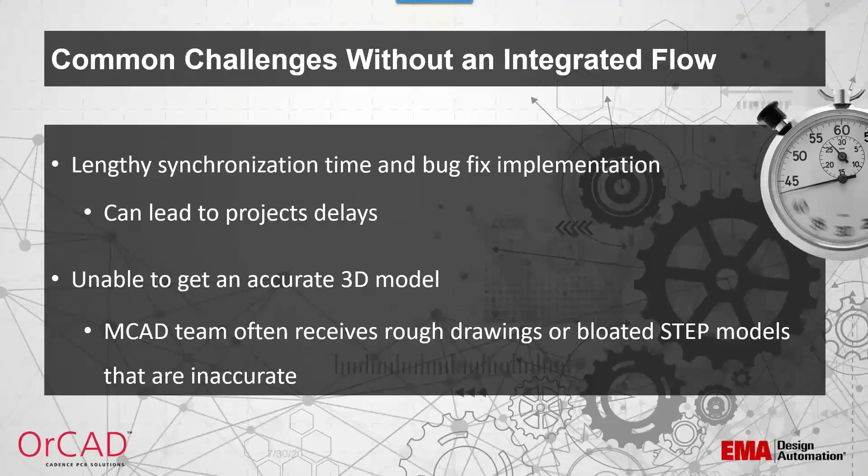CADsync offers a native ECAD-MCAD bidirectional interface, which allows the two teams to quickly and easily manage and sync parts, improving overall productivity. With CADsync, there's no need for clunky middleware or the need to schedule meetings and pass emails. The bidirectional interface supports keep-ins, keep-outs, copper features, including copper areas, silk screens, and assembly layers. You can leverage the CAD data within your tool to send updates and keep everybody in sync to prevent integration errors with the native file structures.

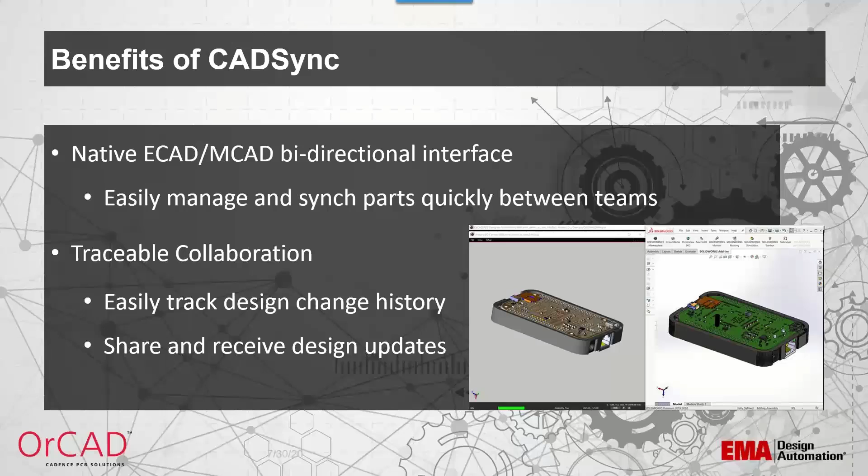With traceable collaboration, it's now easy to track design change history. This helps ensure the design intent is communicated correctly. CADsync helps the MCAD team collaborate with the ECAD team by communicating mechanical requirements and managing common elements such as mounting holes and board outlines.

CADsync provides the ability to create new SolidWorks parts from STEP models that are attached to parts in PCB Editor. This can be a huge time saver for the MCAD team. It also prevents mechanical engineers from receiving STEP models or 2D drawings that are inaccurate and slow to load. SolidWorks can import ECAD objects as solid features into the design.

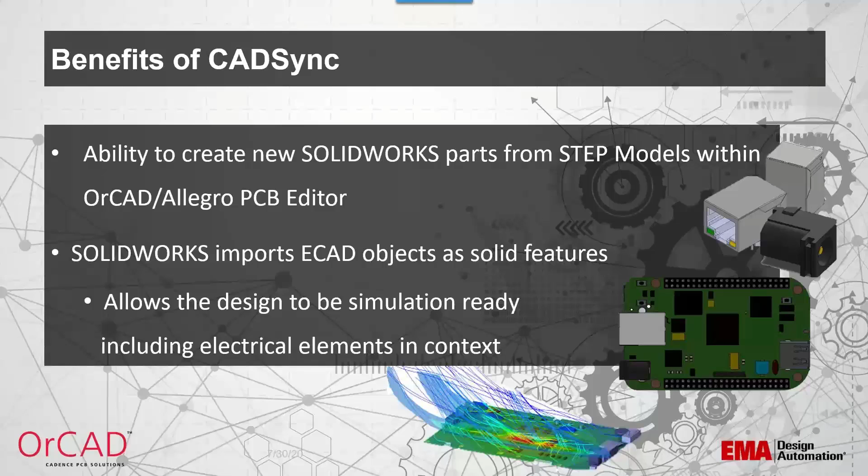Leveraging the PCB data as SolidWorks parts, features, and assemblies allows the ME to treat these as they would any other solid model. The pads and traces are imported as extrusions with copper thickness from the surface layers of the PCB. This feature also sets the design up for simulation, since the electrical elements are put into context, leading to the most reliable path to production. SolidWorks versions 2017 through 2020 are supported by CADsync.

CADsync uses a collaboration area that can be accessed by the ECAD and MCAD teams. The CADsync proprietary files are read from and written into this collaboration project folder. During collaboration, comments can be added to the incremental change files that are sent back and forth between the two teams. Special CADsync menus and integrated icons are incorporated into SolidWorks. These allow for easy navigation and editing.

CADsync can take a STEP model and generate a 3D SolidWorks part from the PCB Editor footprint. This SolidWorks part can then be added to the PDM flow. This allows for the ability to include data managed parts. With native solid modeling, the ME can view, inspect, and modify the imported parts within SolidWorks.

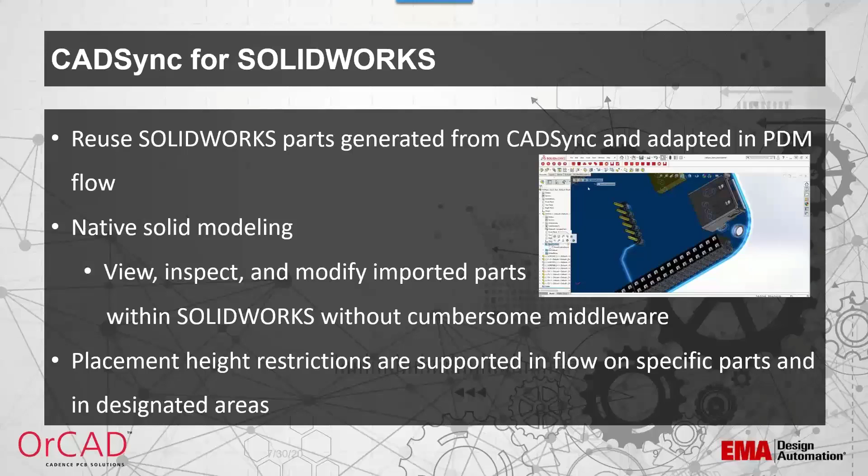This feature helps with implementing new design changes and fixing design errors much faster than alternative methods, such as sending DXF files. Placement heights for parts and regions are supported within the CADsync flow. If a part is placed in a height-restricted area, the PCB designer will be notified of the error in PCB Editor.

The PCB tools utilities allow users to start their design intuitively, then easily add the ECAD features to components, cutouts, mounting holes, keep-ins and keep-outs, and copper areas within SolidWorks. For example, the creation of keep-ins and keep-outs are automatic and imported as transparent extrusions which allow for easy viewing and can be suppressed if needed.

The feature tree is used to organize and manipulate the PCB features. The available features can be filtered by keep-in or keep-out type, hole size and type, or component ref des and part name.

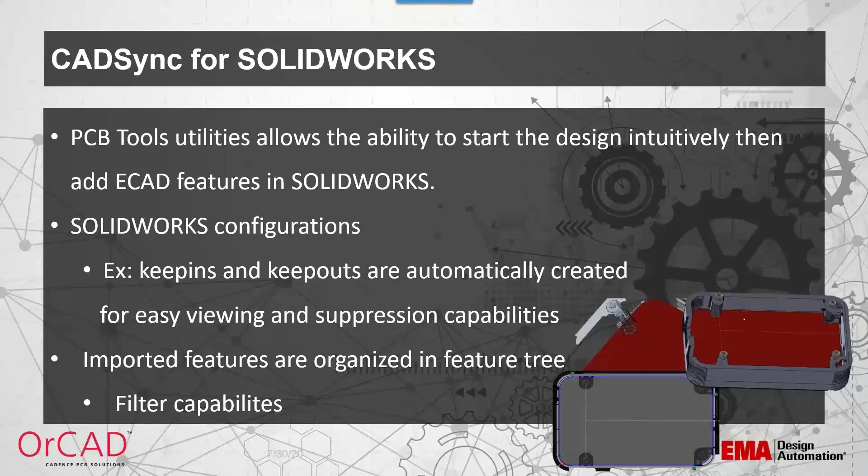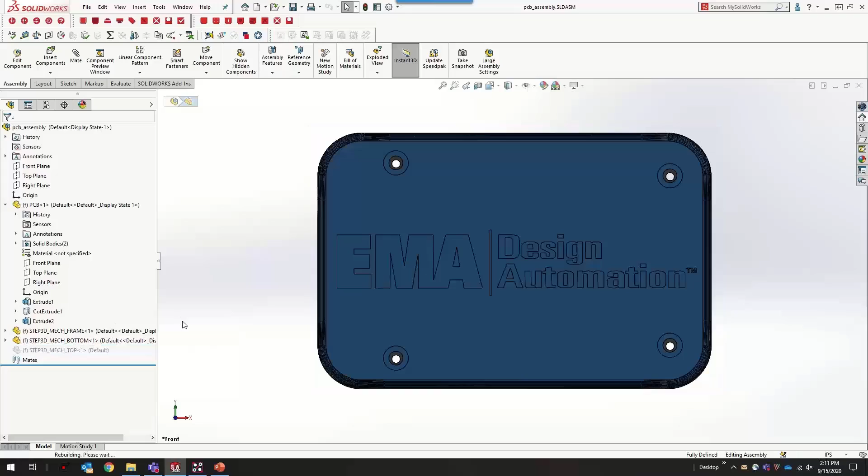So now I want to show you just the interface of CADsync between SolidWorks and PCB Editor. What I have here in SolidWorks is an enclosure with another assembly inside of it. So in here, I'll just go ahead and suppress the top of the enclosure so you can see what's inside. So I have another assembly in here that we're going to use as a board outline that will pass over to PCB Editor. And in here, I can put in features for the PCB.

So at this time, I can check the parts in the assembly. We see we have a PCB, but there's nothing associated with the PCB in this assembly. So what I want to do is go into this board outline part and add these features in so that PCB Editor knows what each of these features is when it comes over. So as you can see here in the feature tree, right now I only have a couple of extrudes and a cut extrude. So I can use the CADsync menus at the top to assign PCB features to this part.

Right now, the first thing I'll do is just show the part features. So this is going to show what features are currently set up in the part. So right now, we have no PCB features in here, so it needs to be set up. The first thing I need to do is assign one of these extrudes as the board outline. To do that, I can use the Assign PCB Outline icon.

And in here, it says Board Outline. I'm going to use Extrude 1 as that board outline. And now if you look at the feature tree, you can see there's a board outline over here with Board Outline Sketch under it. So it's no longer listed as an extrude. The next thing I can do is assign hole features to these cut extrudes. I have the option of assigning plated or non-plated mounting holes. I'm just going to select non-plated.

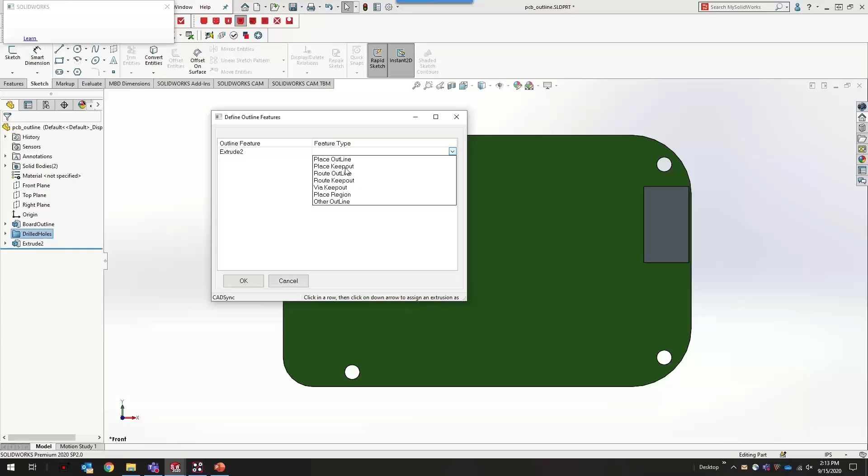And then this last extrude could be assigned as a place keep in or keep out, or a route keep in or keep out. To assign a feature here, we can assign the outline features. Now it's selecting Extrude 2, and I can choose what I want this extrude to be. I'm going to make this a place keep out in the PCB. And looking at this from the side, you can see that there's actually an offset from the board. So this allows you to send over minimum and maximum height restrictions to the PCB designer.

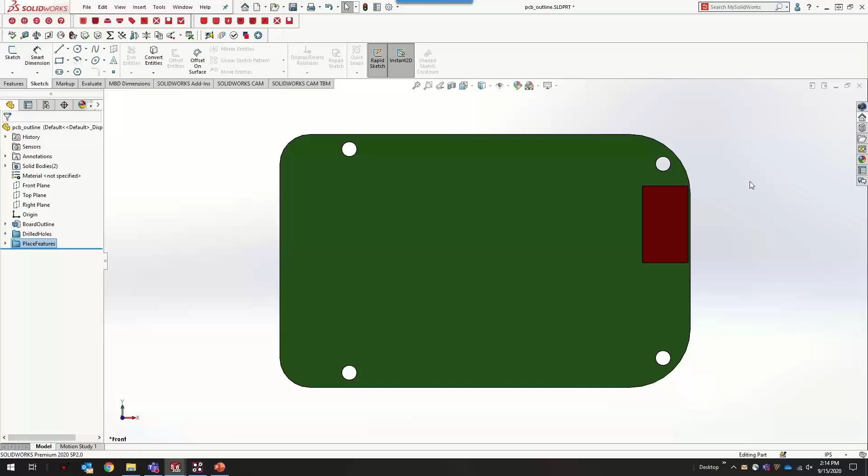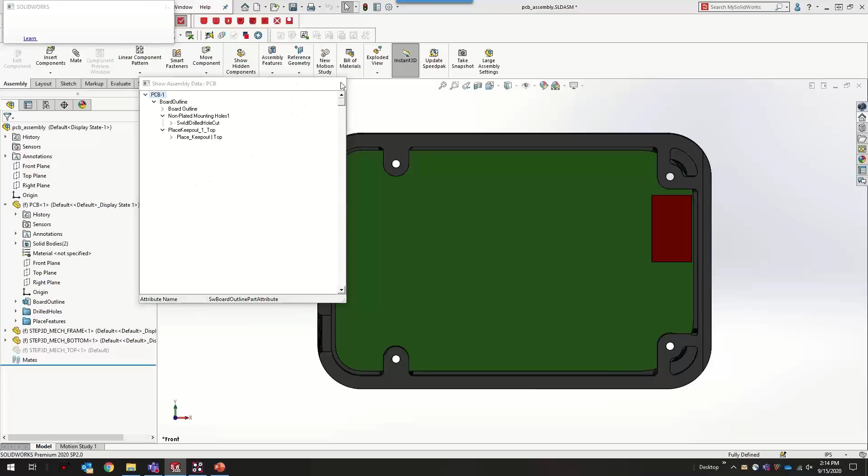So if I go ahead and save this and bring up the assembly again, you can now see that this assembly has all the PCB features that it needs to go over into PCB Editor. I can do a show assembly data here, and before we had seen nothing. Now we have a board outline, and there are holes in here and a place keep out. So this is set up to go over into PCB Editor.

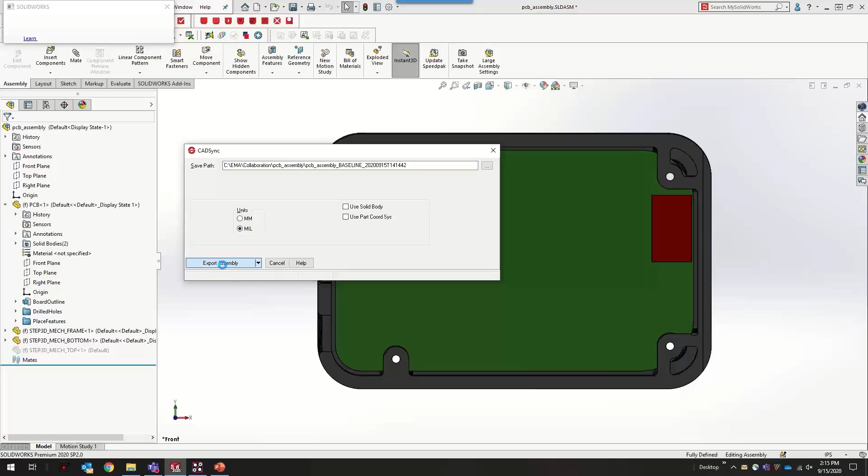At this point, I can go into PCB Editor and import that file. So we have an export from SOLIDWORKS and an import into PCB Editor. So using the CADsync menu here, I can select Import. It goes into my collaboration directory that's already set up. I can click on the baseline file. And these are the different features that were added in CADsync in SOLIDWORKS. So you see I have a board outline, the drilled holes.

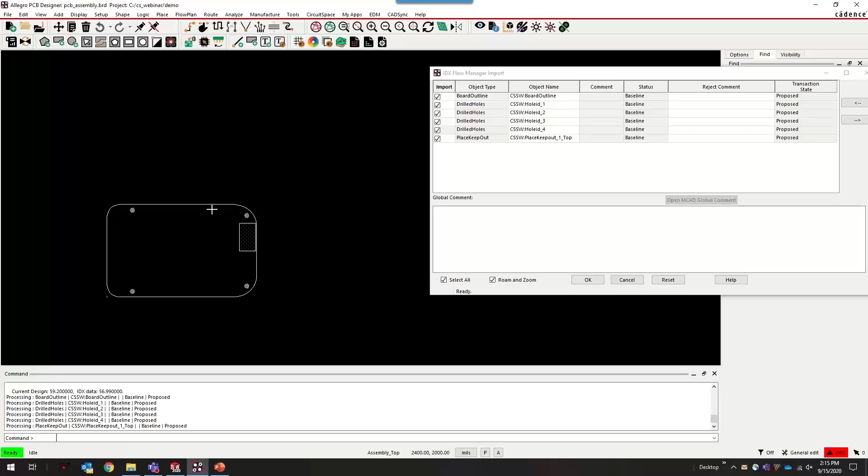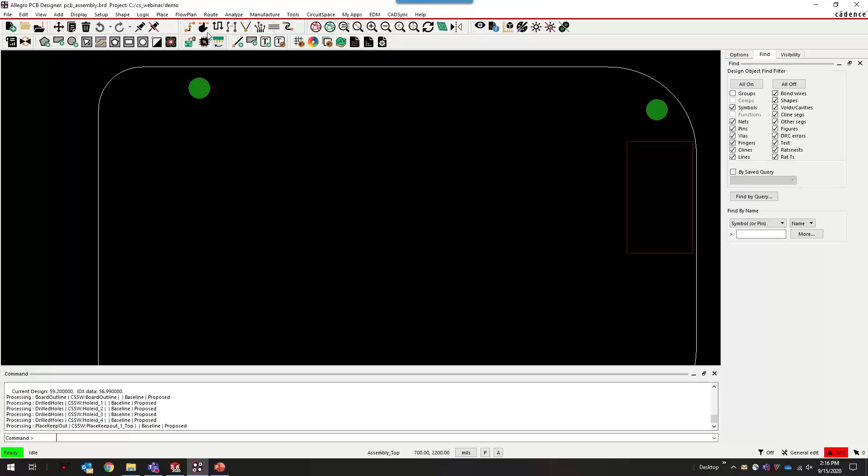If I select each one of these, it's going to show a preview of them in the canvas. So if I zoom out, this is everything that was defined over in SOLIDWORKS. I can say OK, and that just imported my baseline into PCB Editor. And looking in here, I do have a package keep out on the top that I set up, and then the design outline. So everything came in on the layers that were required. Now this board already has a netlist in it. So what I want to do is bring in one of my parts.

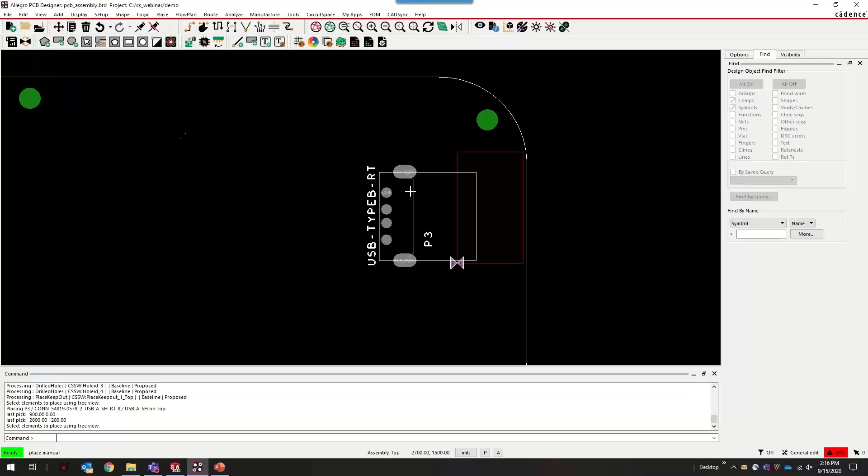So I can bring it in here and then just rotate it. I'm going to place it into this place keep out area. You can see there is an error here. So that place keep out that you had set up in SOLIDWORKS did come over into PCB Editor. So I'm going to go ahead and just move the part out of that area since it is a keep

out area. And I also want to add a route keep out shape and pass it back to SOLIDWORKS. So I'm just going to put a rectangle on the top layer. So now I have a couple of changes that were made. I added a part and I added a route keep out. So I need to get this back into SOLIDWORKS.

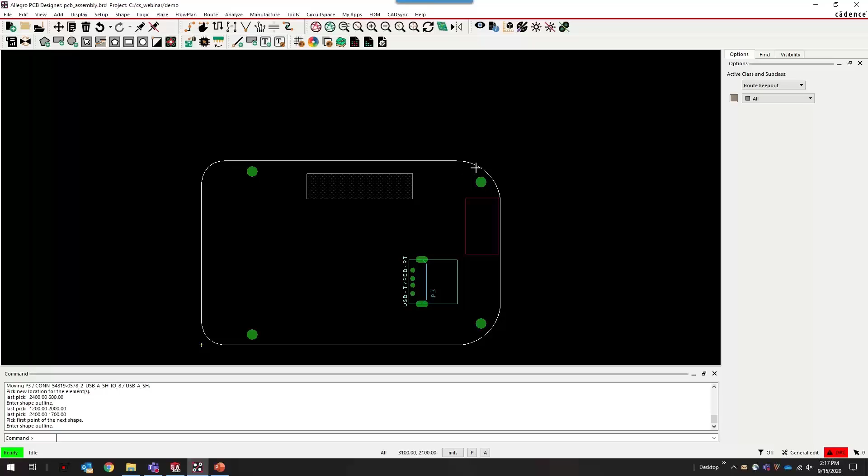I can do this using collaboration. At this point, once you have exported from SOLIDWORKS and imported into PCB Editor, you're in a collaboration mode where only the changes are going back and forth between the tools. So I'm going to push the updates, and then I can tell it which changes I might want to send

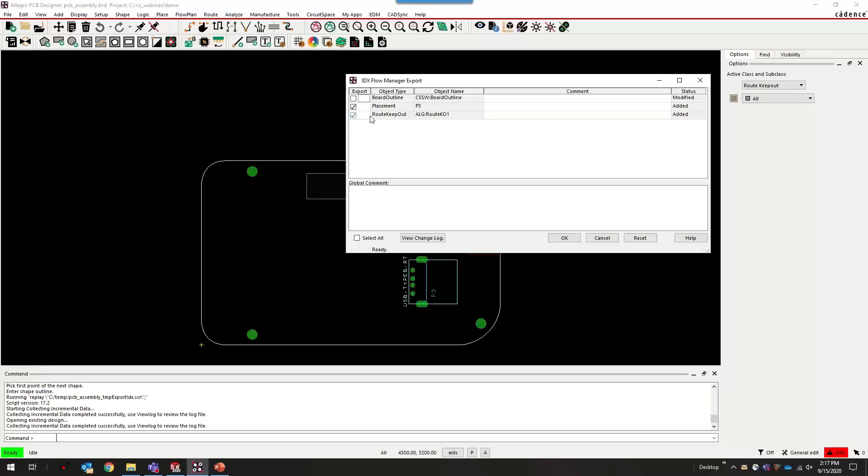over into SOLIDWORKS. There is a board outline change here, which is just that the thickness of the stack up in here doesn't match the thickness of the board in SOLIDWORKS. I'm not going to resolve that right now. But I do want to send over the placement of P3 and the route keep out that I added. So I can click OK.

It wrote out a file to my collaboration directory. Now it's waiting for a response from SOLIDWORKS. So it pings the directory and it's just waiting to see if there's a response file from SOLIDWORKS. Right now it's not seeing anything, so it's saying no MCAD data available.

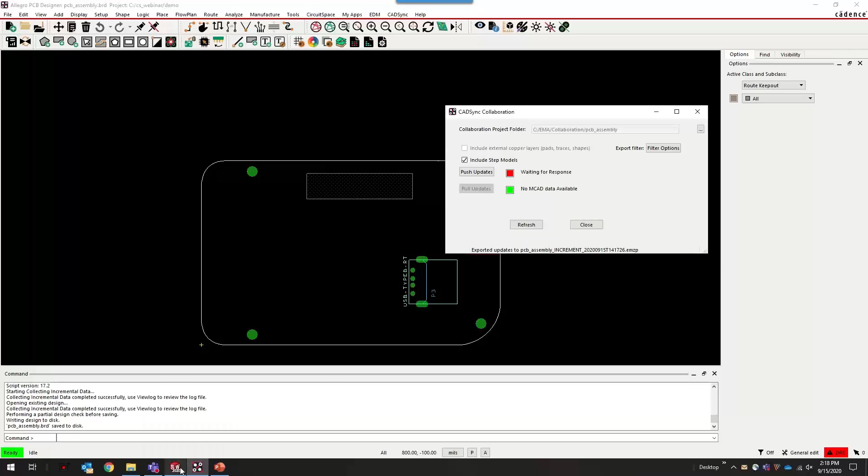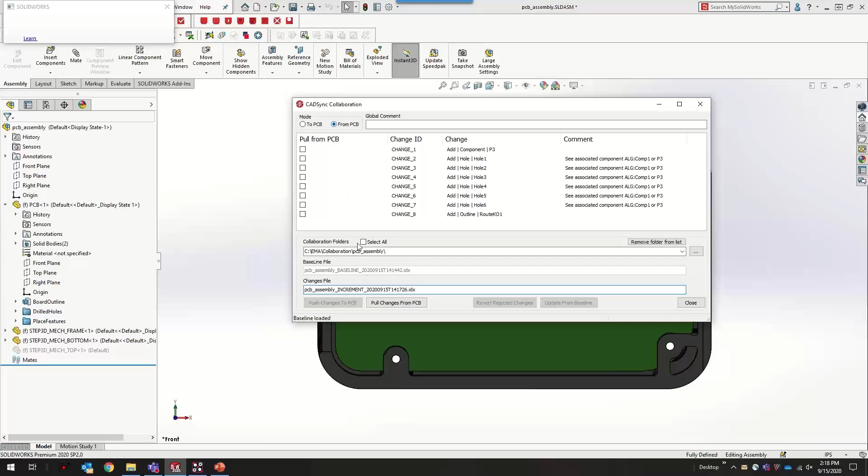So I'm going to go back over into SOLIDWORKS, and I need to bring these changes into SOLIDWORKS. And to do that, once again, I need to use collaboration. So on the SOLIDWORKS side, the two modes for collaboration are to PCB and from PCB. Since I want to bring changes in from the PCB, I'm in from PCB mode. And I can select which changes I actually want to bring into the board file here.

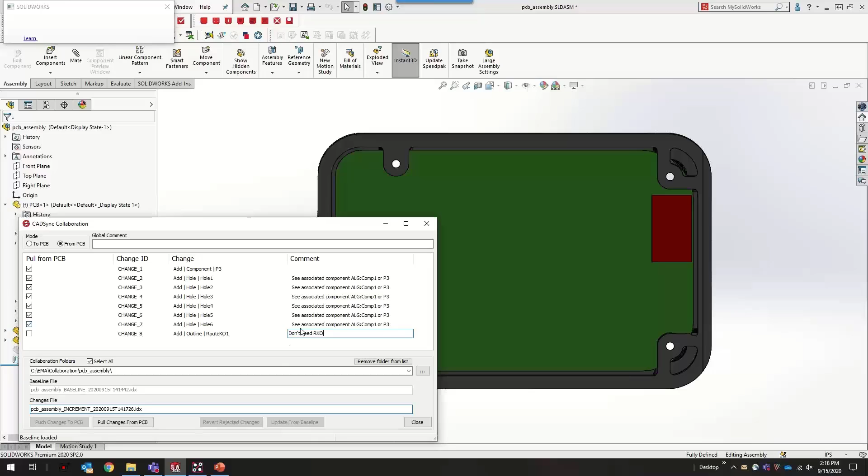But let's say I want to accept the component that was added, but I don't really need the route keep out. So I am going to uncheck this, and that's going to reject the change. I can put a comment in here that I don't need the route keep out, for example. And then once I have everything in here, I can just say pull changes from the PCB.

Now what it's doing is it's looking for this SOLIDWORKS part for the component that was added in PCB Editor. It did not find it in a library, so it created this part on the fly based on the step model that was assigned in PCB Editor. So this part was just generated by CAD Sync and placed on the board as you watched it right here. So this is a great way to get your parts into SOLIDWORKS from PCB Editor using the step models.

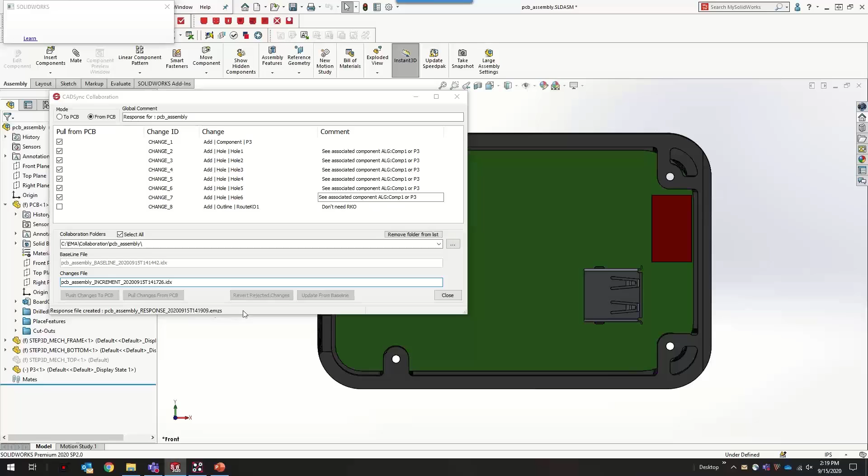Now looking down here at the status line, you can see a response was generated. So this is the response file that PCB Editor is expecting to see so it knows what has been accepted and what has changed. I'm not going to process that just yet. So what I want to do is just move this component. I might want to move it closer to where it actually belongs in the enclosure.

And once I've moved it, I need to send this back over into PCB Editor. To do that, we're still in collaboration mode. So at this point, I want to go to PCB. And the only thing that I've changed is that I moved P3. So I'm going to select that and say push changes to PCB. Now it wrote out an increment file. So these are the incremental changes that are being added into PCB Editor.

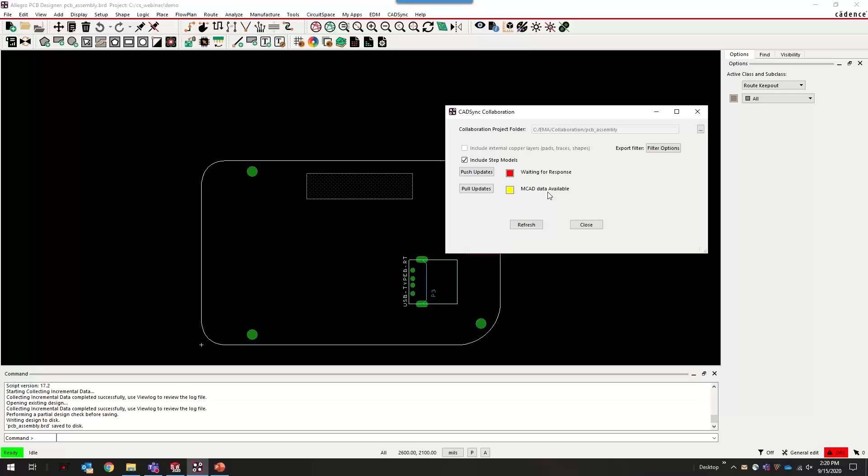Then coming back to PCB Editor, I'm going to refresh this form. By refreshing this, it's gone back out to my collaboration directory and said, oh, I have a couple files there I need to process. So there's a response file and an incremental file. I'm going to pull the updates, and here you can see which file to import. I'm going to process the response first so that I know what the mechanical engineer has accepted.

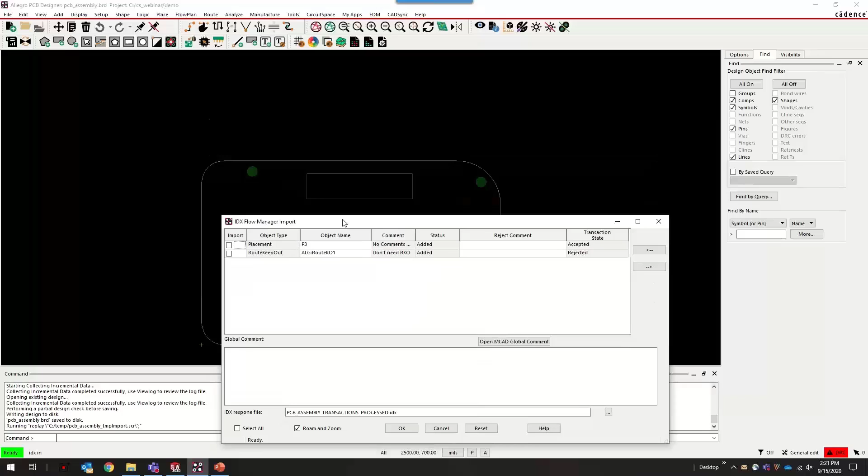So doing this, I see, oh, my route keep out was rejected. I'm going to go ahead and just check both of these, say OK. And then that route keep out was removed from the board. So that rejected change got processed by PCB Editor, and the response was processed.

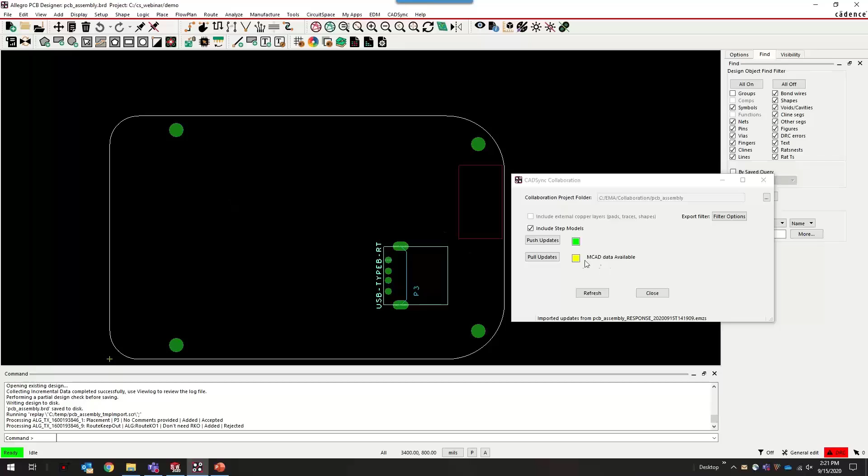But there's still some information out there that PCB Editor needs to bring in. So I'm going to go ahead and pull the updates. And here's the movement of P3. If I select it, you'll see a preview showing where that part has been moved to. I'll say OK, it's accepted that change, and now everything is green again. So the board is in sync with SolidWorks, and we're OK to go on with things.

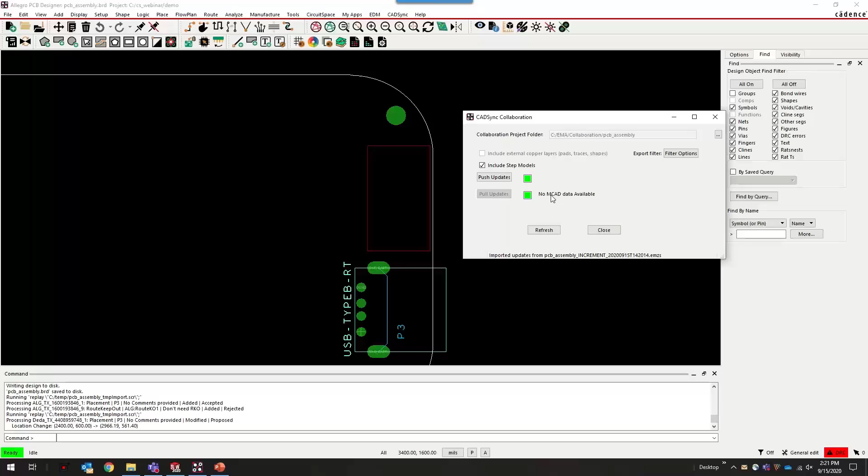And this is really the process that you're going to use between the two tools. Once you export from SolidWorks and import into Allegro, you're in your collaboration mode, and changes are being written out to your collaboration directory for the two different tools to process the responses and the incremental changes. So that's the flow between the two tools.

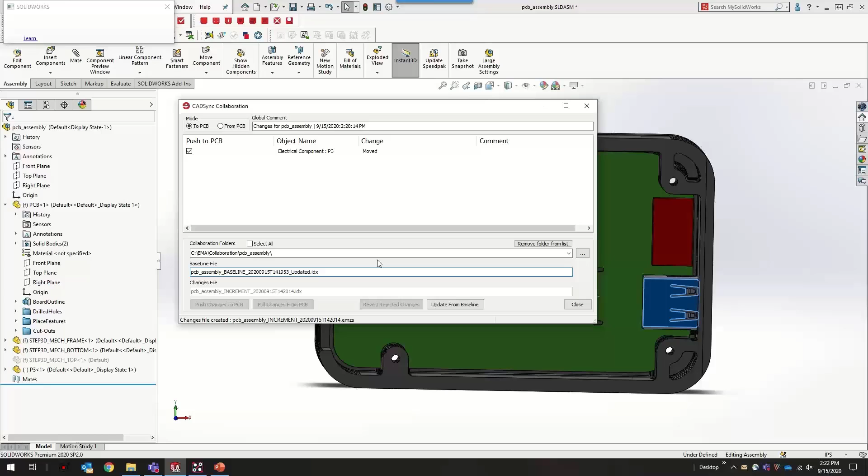So for our first question, Sue, can you go over the versions of SolidWorks that are supported with CADsync again? Yes, SolidWorks 2017 and above are supported with CADsync. Okay, thank you. Does this require CircuitWorks? No, this connects directly to SolidWorks. CircuitWorks is not needed in the flow with CADsync. Does this work with both OrCAD and Allegro? Yes, it works with all tiers of PCB Editor.

What features are supported in CADsync? The features that can be imported and exported are parts, holes, board outlines, keep-ins, keep-outs, and copper area shapes. Pads and traces can only be imported from PCB Editor but can't be exported. Part heights are also recognized within the CADsync flow. Any placement height errors will be flagged in PCB Editor. Okay, thank you. So what happens if I already have parts for some of my components in SolidWorks? CADsync looks to see if there's any matching parts in your library before creating a new one.